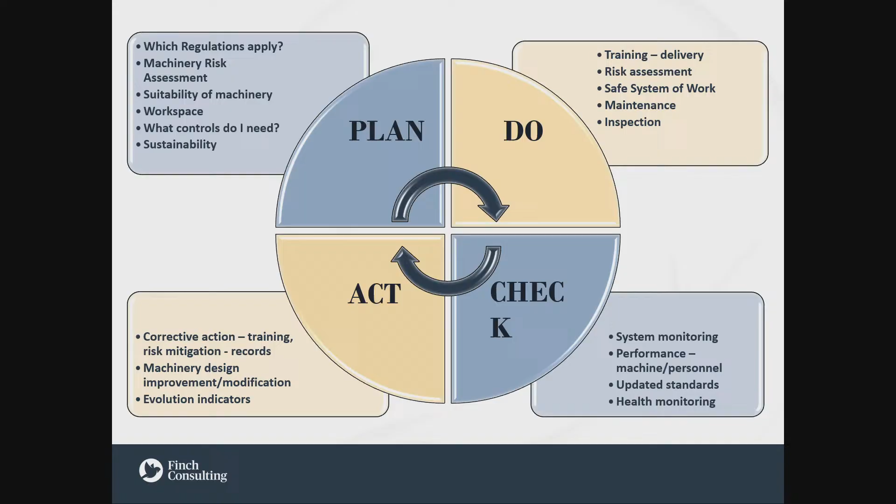So basically, going back to the original slide here, what we're looking at doing is disrupting this complacency cycle. We'll not forget about the left-hand side, we just don't want it. So what we're looking at doing is disrupting this complacency cycle once you've got a decent system in place and you've got the machinery and the processes that are safe. And as I referred to in the previous slide, you've got a decent plan in place.

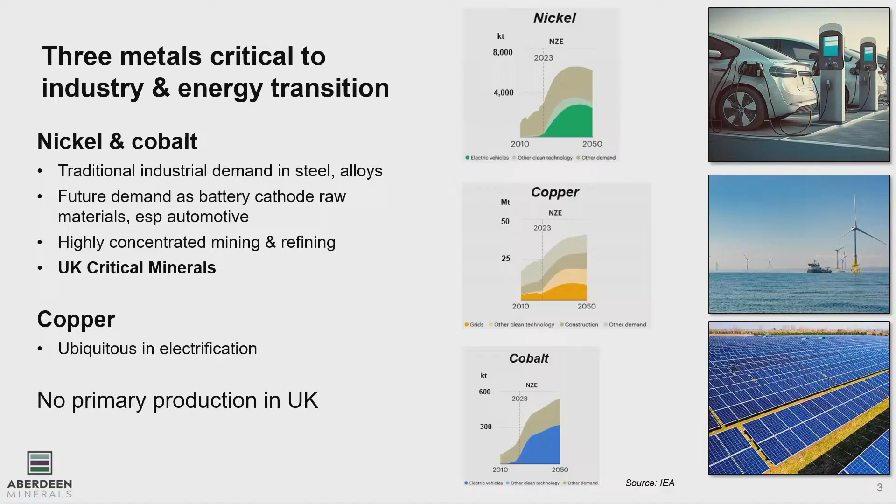The darker the green colour, that indicates that multiple of these materials are considered to be prospective in each of those regions. You can see there that North East Scotland features quite strongly, and that's because the geology is very favourable for nickel

copper sulfide deposits in particular. There are several documented discoveries. We're working on one of them. The favourable geology has historically attracted large mining companies. Rio Tinto consolidated goldfields in the 1960s, AMAX in the 1970s. Falconbridge also took a look at the area. And Inco, a large nickel producer that was taken over by Vale, was active in the area in the mid-2000s.

Despite that history of exploration, the region is very much considered to be underexplored using modern exploration models and technologies. It's an area that's very rich in infrastructure. Good access by roads, excellent access to energy, in particular increasingly renewable energy. The area where we're working is about 20 miles away from two major ports, one at Aberdeen, one at Peterhead, and we also see great potential for a future workforce.

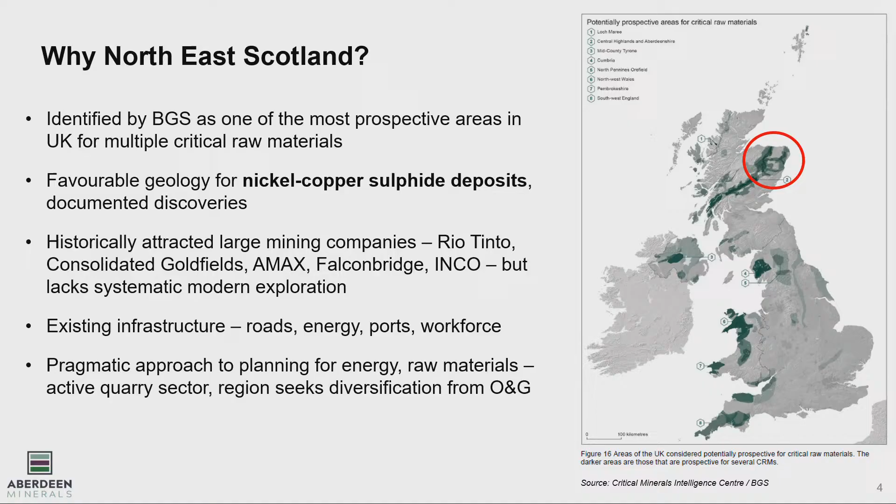The area we're focused on is called Arthrath. It is currently the largest nickel deposit in the UK, and there's a very interesting little discovery story that involves neeps or turnips. And again, if you want to find out more about that and the role of root vegetables in mineral exploration in North East Scotland, we can talk about that a bit further in June.

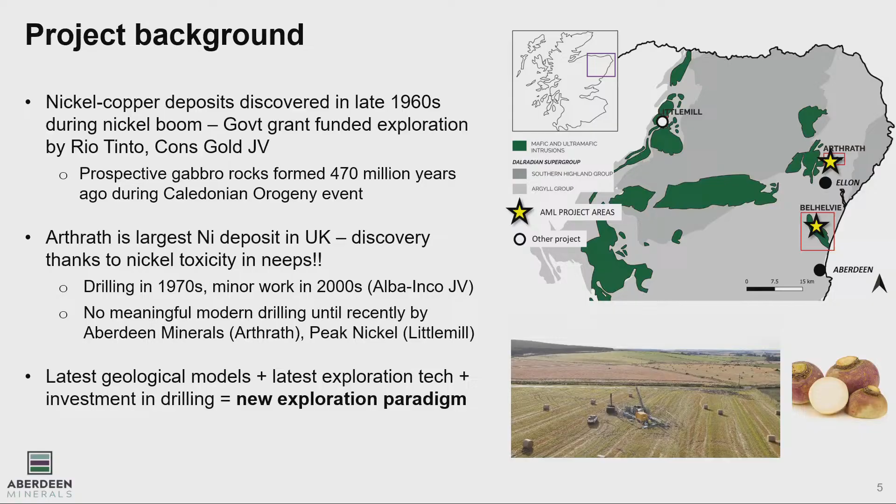So a lot of drilling in the 1970s, a little bit of work in the mid-2000s, but basically no meaningful modern drilling until very recently by ourselves and our colleagues in another private company called Peak Nickel, who are operating over in the western belt on that map there in the area shown as Littlemill. And what we're both doing is applying the latest geological models, the latest technology, investing in drilling for the first time in decades to establish a new exploration paradigm.

And central to all of that is the formation model, what we call the magmatic sulfide conduit model, which was only developed since the 1990s, so after a lot of that historical exploration took place, and this is why we have a new paradigm. We actually have a different, fundamentally different basis in which to explore for these deposit types. This model type just wasn't known about, it wasn't considered until the 1990s.

The sulfur then forms a separate magma made up of iron sulfide, and it's that iron sulfide during that magmatic phase that actually preferentially attracts in any nickel or copper that's floating around in that magma. So the metals of interest are sequestered into sulfide, and then when the magma cools down and starts to solidify, the sulfide minerals are very dense, and so they preferentially gravitate towards the base of these intrusions and form metal-rich accumulations of massive sulfide in trap sites along the base of the intrusions.

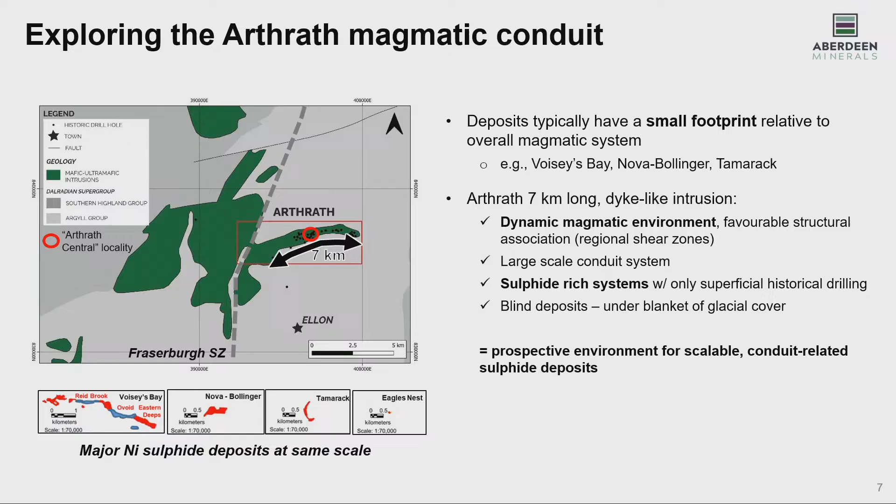So we basically have quite a large playing field at Arthrath, and the little black dots on that map are the historical drill holes. So yes, there has been historical drilling, but it's by no means been comprehensive along the totality of the target intrusion.

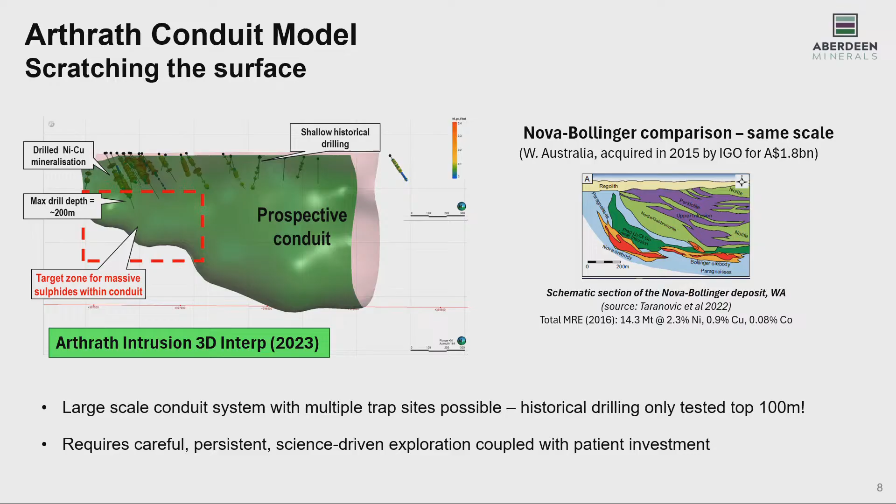Just to illustrate the scale of the prospect that we have, the diagram on the right is a cross-section through the Nova Bollinger nickel sulfide mine in Western Australia at the same scale. The orange and red outlined areas are the semi-massive and massive sulfides - those are the economic parts of that deposit. Again, you can see why we're pretty excited about the scale of the opportunity at Arthrath. There's plenty of scale, plenty of scope to host deposits of that scale.

But carrying out that exploration requires persistence. It requires deep-seeking geophysics, it requires investment in deeper drilling. And those are the steps that we've been following over the past 2 or 3 years with our exploration. We've invested heavily in geophysics, bringing the latest technology to this area that hasn't been explored systematically in over 50 years.

The key property of the nickel sulfides is that they are electrically conductive, so you can use electromagnetic geophysical techniques to directly detect these deposits in the subsurface. The deeper seeking the geophysics, the better opportunity you have to actually find these deposits which remain undiscovered. So the latest technology lets us see through the surface cover and explore for these deeper deposits in more detail than has ever been possible before. We then use other ground-based and borehole geophysical systems, some of this technology for the first time in this area, to expand the search space of our exploration.

But the key thing really is drilling. You can only do so much with geophysics. It tells you about the general properties of a target area, but until you actually get a drill hole into the ground, you're really just guessing what the geology is doing.

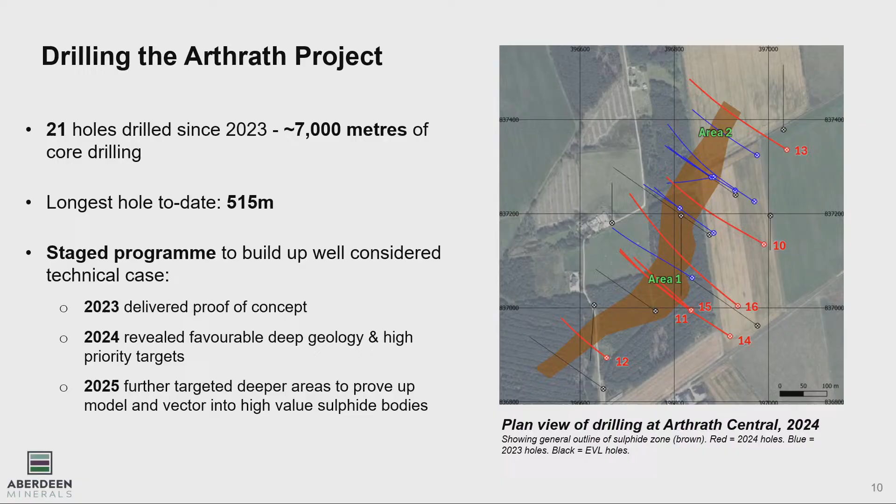So we've been doing a staged program over the past 3 years. In 2023, that was our first drilling campaign - we delivered the proof of concept, and I've got a slide on that in a minute. Last year, we extended our search to put in even more deeper holes and identify targets to focus on. And in 2025, we've continued that work, and in actual fact only demobilised the drill rig from the latest round on Tuesday this week. So we're just coming off the back of another exciting summer drilling programme.

So low impact, low footprint exploration, but in terms of our technical success, really exciting and high. Basically, the drilling that we're doing is transforming our understanding of the potential of North East Scotland. So it's an exciting time.

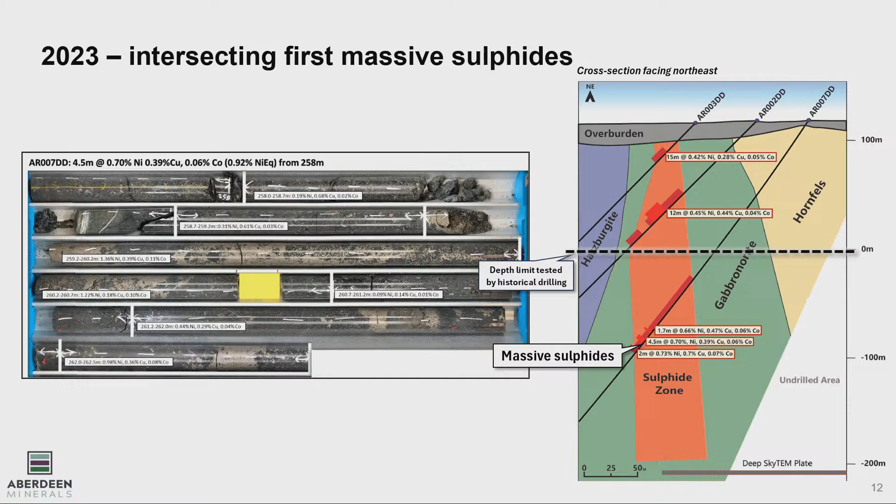So then 2024 was about taking that concept a bit further, that the deeper we go in the system, the more prospective it becomes. Remember our model, we're looking for parts of the intrusion where we hit the floor, or we hit little nooks and crannies where these dense sulfides become concentrated in gravity traps. And that's exactly what we found in our drilling last year.

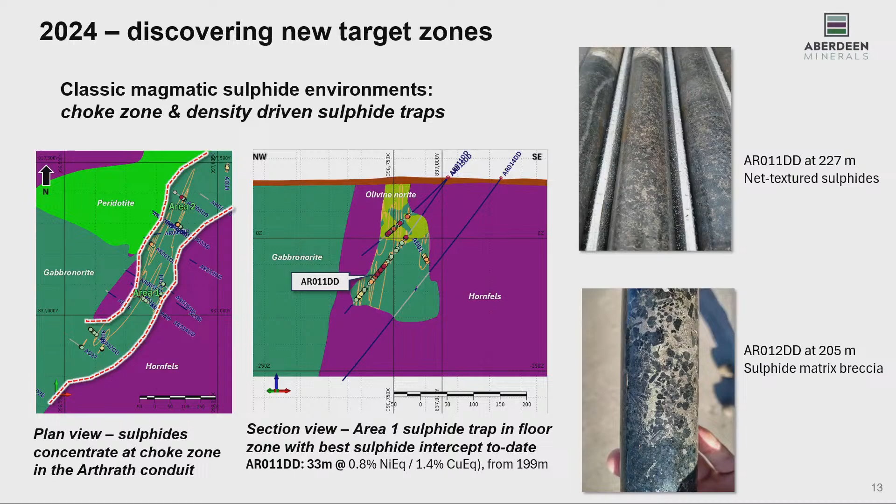And this year's drilling has just taken that all a step further. What we found is that in certain parts of the deposit, we still didn't actually know where the floor zone of the intrusion is. Because understanding that part of the geology is a key part of our model, it was very important to get a more deeply penetrating hole to understand where the base is.

The exploration system there, the prospective geological system, is in operation. We just have to put more drilling in to test it. And some of the drilling results from this year's program have given us some of the best geological textures that we've seen.

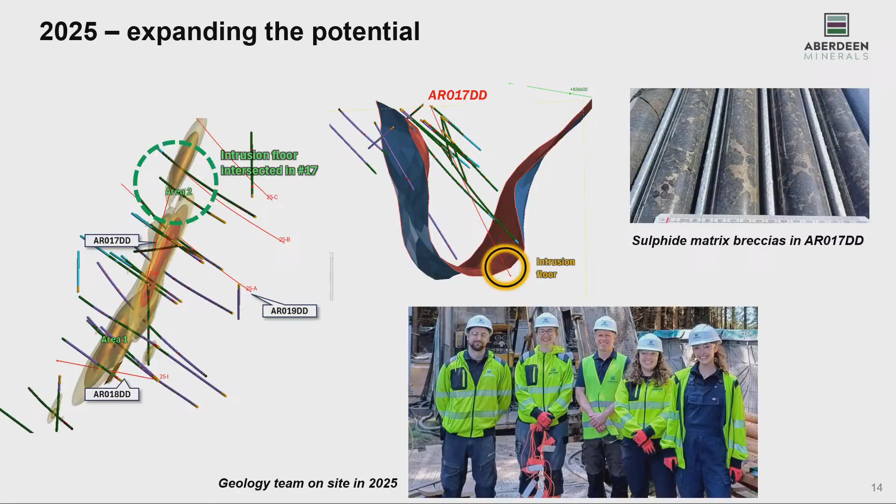The top right-hand diagram shows sulfide matrix breccias that have formed, where basically there's been so much sulfide in the system that it's actually brecciated the host rock. And those are the types of geological clues we want to follow to continue our exploration in the hunt for metal-rich massive sulfide deposits within this prospective system.

So we are really excited about our exploration. We feel as if we're just getting started. We've got another phase of drilling to look forward to, probably into next year, subject to further financial backing.

A key thing about operating in northeast Scotland: if we consider where our nickel currently comes from, the jungles of Indonesia and elsewhere, we think we've got a real advantage developing this type of project in an area like northeast Scotland, a pre-existing industrialised landscape. We can leverage existing infrastructure. We can win value for communities from land which is already nature degraded through intensive agriculture. And it can all be controlled by a very robust planning system to ensure that when we secure raw materials for our energy transition, it's done in a suitably responsible manner.

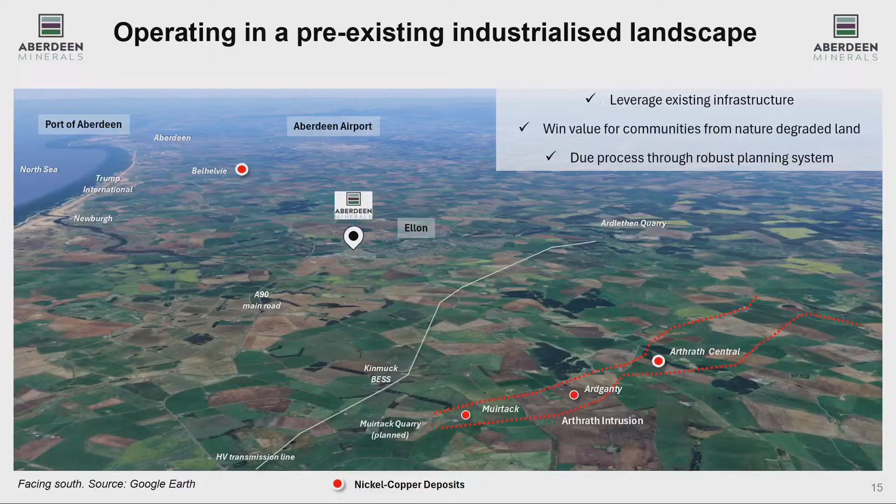So the model we're following, and the nature of the target type, because we're looking for these deeper, higher value but potentially quite small deposits, that target type is well suited for underground mining techniques. So you would access it through an adit or a ramp, and all your mining would be done underground. You would bring that material to surface where it would still need to be processed. So you'd still need some processing infrastructure, but if all you have is your processing on the surface, that results in a much more limited footprint compared to, for example, the open strip mining currently used to source our nickel.

It's about support from the community at the end of the day. Very much so. It's about making the most of the natural resources available to us, but developing them in a way that is responsible and acceptable to those communities. Absolutely.

That was very interesting. Obviously you've only done preliminary drilling as such, and you haven't got the extent of the maximum strike of the ore body yet, so it's very, very hard at this stage to put a resource on there. How long do you think it'll be before you'll be able to add in a resource of what you may or may not have? Yeah, obviously, the sooner we can get to that point, the better.

There is an existing deposit, and we've got a good handle on the grade and tonnage of that existing deposit. But it's not our ultimate target. We're looking for the deeper deposit, which we believe is there, which is higher grade. As soon as our exploration outlines whether that deposit exists and gives us the basic scope of it, the intent then would be to do the detailed drilling required to bring it up to a resource estimate as soon as possible.

18 months ago I stood here and did a little call to action just to make everybody aware about what we were on the cusp of. We're still on the cusp, and I come fresh from Paris, where it was the International Hydropower Association. The reports from Paris are we are on the cusp of an international renaissance in large-scale, long-duration storage of energy to make up for the intermittency of solar and wind, which is the solution to our energy transition.

The story is that pumped storage still brings us flexibility. It creates critical grid stability, and as the earlier presentation by Siemens illustrated, we're using these compensators just now for that inertia solution, but we need an awful lot of them to do that, and pumped storage also provides that solution. Importantly, pumped storage also provides a sink to consume power when we've got too much of it in the grid, which was a concern for those that lived in the Iberian Peninsula not too long ago. Is everyone aware of the blackouts across Portugal and Spain?

So importantly, in Paris, we did discuss that we do need both batteries and pumped storage hydro, and so it's not a competition between short-term and long-duration. These are complementary solutions. So why are we talking about that in the mining context? Well, I'll go on to explore that some more later on.

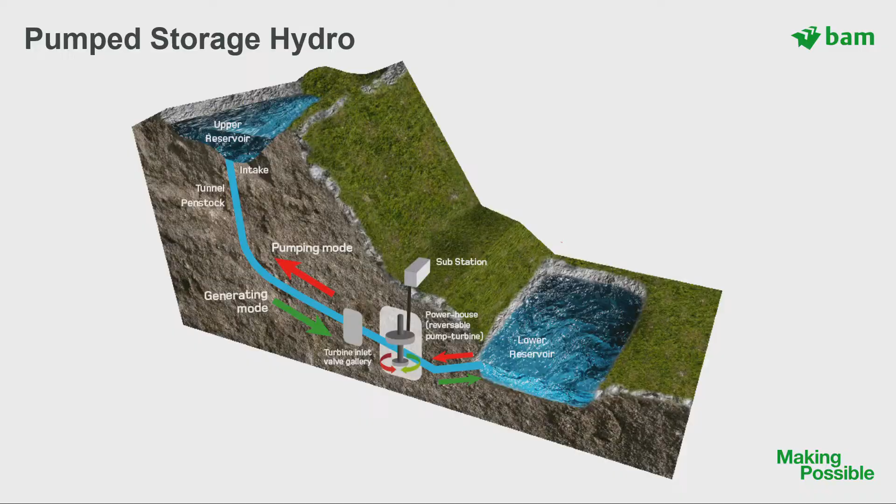How does it work? You were all here last year, weren't you? Do you remember how it works? Keith does. You have an upper reservoir full of water. You let that water out through your hydro plant into a lower reservoir, and then when you've got excess power in the grid, you pump the water back up the hill into your reservoir, store that potential energy for the future. So making up for that intermittency in solar and wind.

We have both closed loop and open loop systems. So in a closed loop, you just exchange the same water back and forward. There are plans afoot, for instance, making use of seawater in that instance. Obviously, you don't want that leaking out into the local environment. Or open loop, in which case the water is passing through the lower reservoir.

So when I stood here 18 months ago, I presented this map, which illustrated potentially 9 prospective sites across the UK, with a predominance really for the hard rock areas where the change in topography, higher rainfall potential, the ability to construct underground spaces in reasonably competent material to cope with the high pressures involved, because we're typically talking about 500 metres of head in these hydraulic systems.

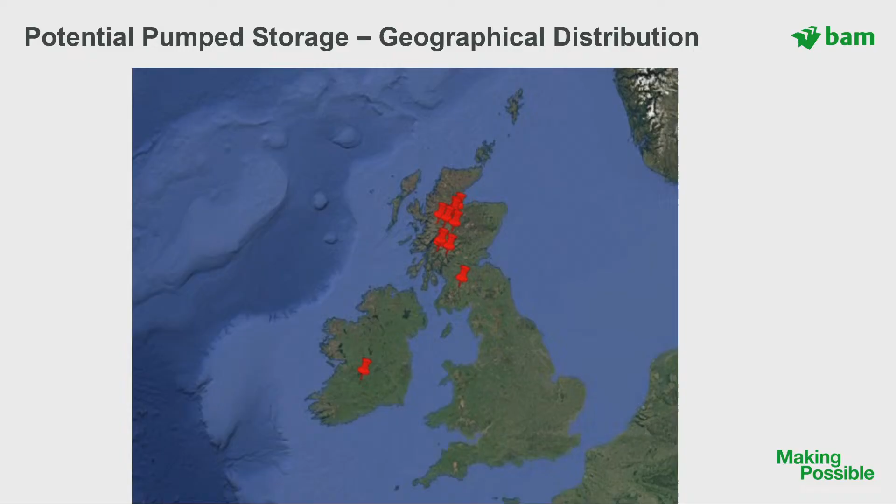So what kind of activities are going to happen? Well, very similar to everything else that we've talked about today. Ongoing on the most advanced projects are exploratory drilling to confirm the ground conditions, environmental surveys for ecology, working out how the hydraulic systems are going to interface with each other.

And then unfortunately, in terms of timeline, there's also that restriction that, generally speaking, the deep drilling to investigate the ground can't go deeper than 200 metres. Is there a reason for that, Fraser? Yeah. You just need a license, yes. So it needs strategic thinking, a bit of forward planning, and you need to submit the paperwork.

So there's only one project that's managed to go further than 200 metres so far, and that's Coire Glas, and they completed one hole to 650 metres. So that's 2 holes. Oh, what's that? You've done it 3 times. Of course you have. And this is why there needs to be the crossover in sectors, because the energy sector, as they would call themselves, is trying to overcome problems that other sectors have already solved.

But it's all about having a strategic agenda that we work towards, a bit of forward planning. Okay.

In the creation of these facilities, large, very large, humongous laydown areas, flat spaces for process facilities are going to be created for substations and above ground constructions. So we're making holes in the ground in areas where there isn't very much flat space just now, because as you can tell from the previous map, it's all mountainous areas.

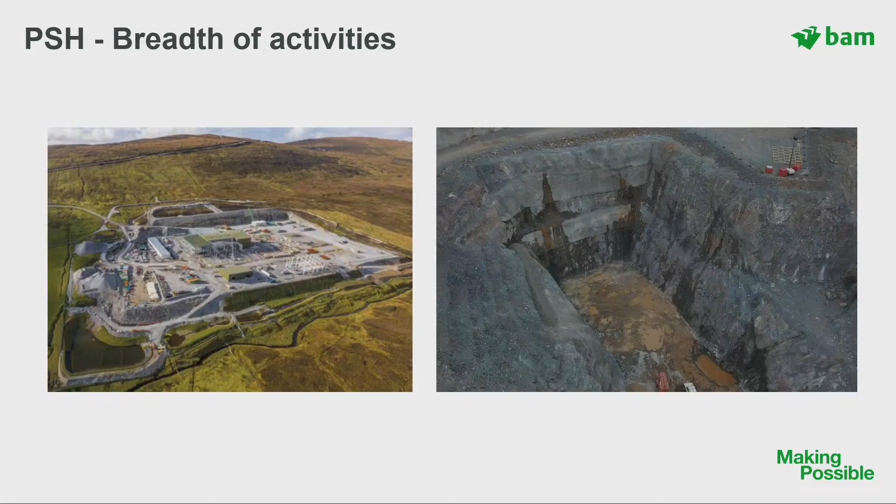Most of the solutions are going to involve underground caverns and tunnels, and therefore we're creating portals and spaces in order to enter underground spaces. And typically the schemes involve, each one of them, around 20 kilometres of underground tunnelling in various forms. And each of the transformer and generating halls are underground spaces, as we'll illustrate in the right-hand photo here. That one there.

They're cathedrals, between 65 and 80 metres high, between 55 and 63 metres across, 120, 140 metres long, all deep underground, generally positioned with their invert level below the level of the lower reservoir. So imagine walking into York Minster or Beverley Cathedral or Westminster Cathedral, etc. A space that big, 600 metres underground, maybe 2 kilometres into the hillside horizontally.

There's also some dams to build, just minor surface works, but probably the biggest of which, the material for these derived from the excavation of the underground spaces, material reused, repurposed for the construction of dams in order to impound these upper reservoirs.

An example would be Coire Glas, where their upper reservoir is 92 metres high, it's 760 metres long. It's of the order of 160 metres wide at its toe. Millions of cubic metres of material constructed over the period of 4 to 5 years creating a dam. It's not one of those things where you click your fingers.

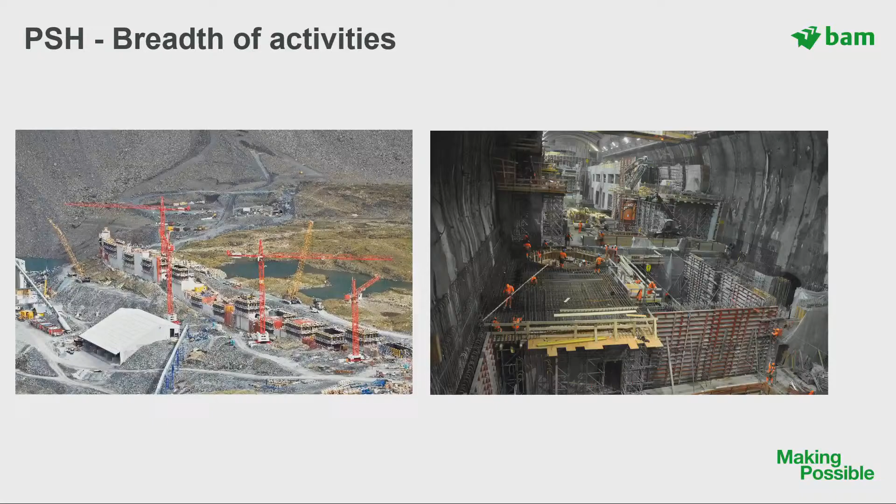Complication as well, when we come to putting water in those tunnels, the rock and lining can't cope with the pressures involved. So getting large steel tubes underground, and not just underground, getting them from wherever we can fabricate them across the Scottish Highlands to a place where we then drive them underground and then weld them together, calling on resources from throughout the world.

The reality being, for steel tubes, potentially manufactured or started to be fabricated potentially in this part of the world or Belgium, and then shipped in parts to the northwest of Scotland. Anybody excited yet?

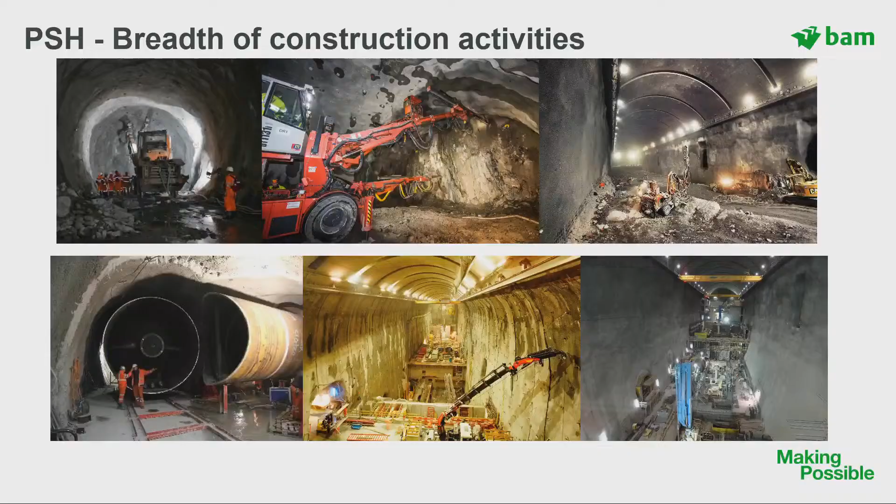So here's one of the schemes that's well advanced. They're in their second phase of ground investigation. This is Loch Kemp on the shores of Loch Ness. Loch Ness, where the monster lies, is their lower reservoir, so a huge potential body of water.

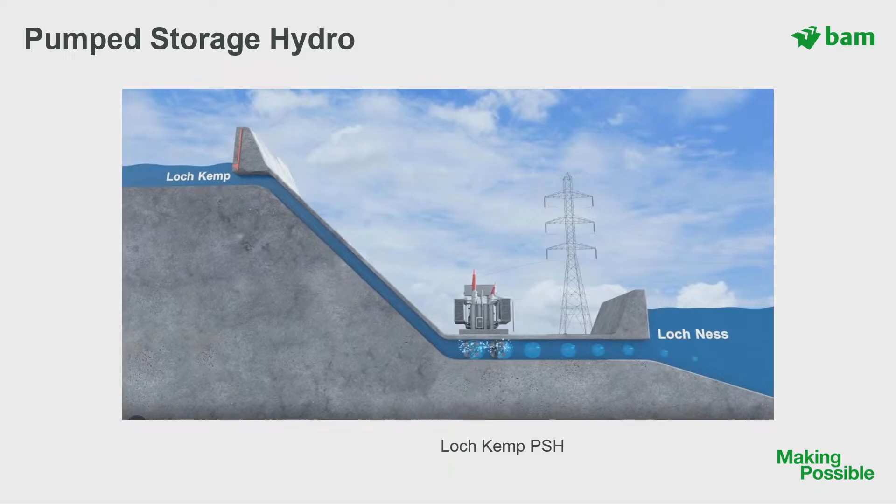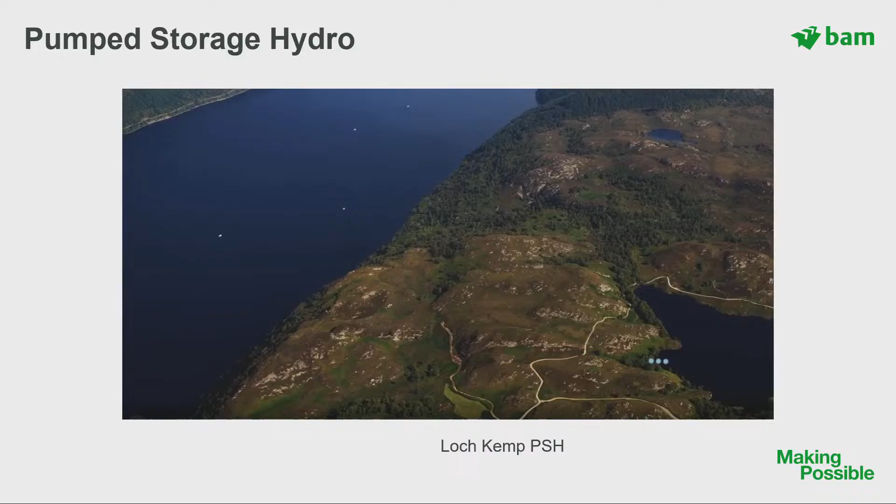Idea being that it can produce electricity when there's demand, and then when there's not demand, pump the water back uphill. Or indeed just spin the turbines so that they're ready to pump, or so that they're consuming energy within the grid, providing that inertia that Siemens discussed first thing this morning. Getting rid of those lumps and bumps created by the wind turbines and the direct current and all these other things, getting everything in phase, a whole part of engineering that I don't quite understand, but I think it's important.

Underground spaces, tunnels, some lochside works, and these lochside works, a slightly different arrangement here in that the turbines, 4 turbines, will be located in deep shafts, 60 metres deep on the shores of Loch Ness, and then the upper reservoir being contained in this instance by 8 dams formed with the material that comes from below ground. And that's one of the potential 9.

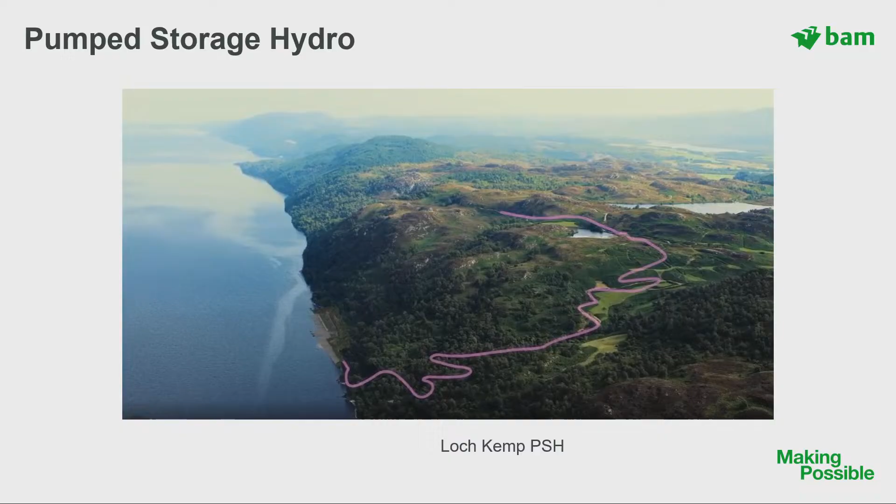We need access, or whoever builds it will need access, I have to say. And this is the potential of what's left on the shores of Loch Ness when it's finished. So what's been happening?

We talked about we need a strategy. We need to know that's what's been done. There needs to be a mandate. The mandate needs to tie up with planning so we can get the permitting, all these things. So NESO, who's heard of NESO before now?

The National Energy System Operator, used to be National Grid, NESO. So they try to predict the different scenarios of what energy we need, where we need it, and how we're going to consume it. They put the strategy in place, they tell us what's needed, and then that really advises us about where the investment happens in the infrastructure, the grid, where we need to produce power.

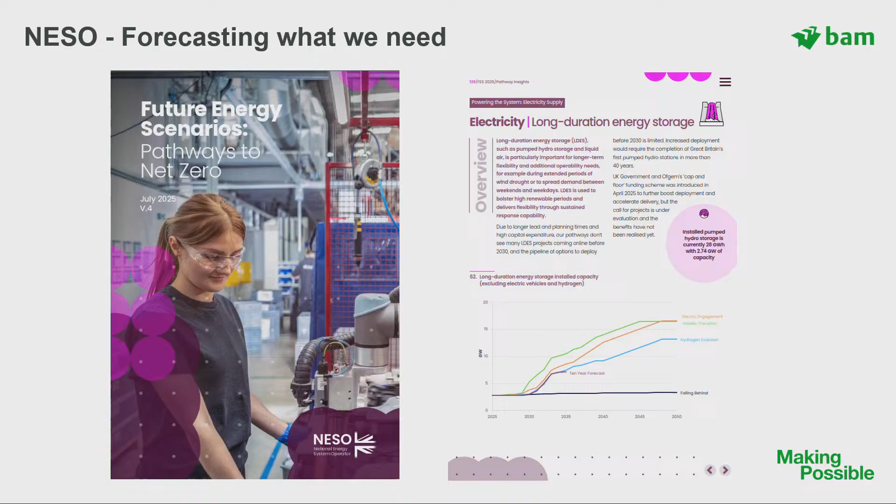So the big driver is net zero 2050. Well, how are we going to get there? Well, as we discussed at lunch, we switch off all our coal-fired power stations, but currently we're buying in renewable power from other parts of Europe because we can't produce it ourselves. So the time ticks over. Importantly, if we do nothing, we're going to run out of power, and we're going to be the same as Portugal and Spain. The lights will go out. So this is what their future scenarios report tells us, and that kick-starts the process.

In terms of supporting the argument for underground construction in the form of pumped storage hydro, their document in 2025 says we've got 2.8, so that's our 4 current facilities. That's in the red circle there. By 2030, we need to have improved that to 5.3 gigawatts. By 2040, up to 14, and by 2050, that's 16.6 gigawatts. So that's 9 or 10 of these power stations built underground and in the ground by 2050 to meet our net zero, alongside all of the BESS units that are currently planned or in process.

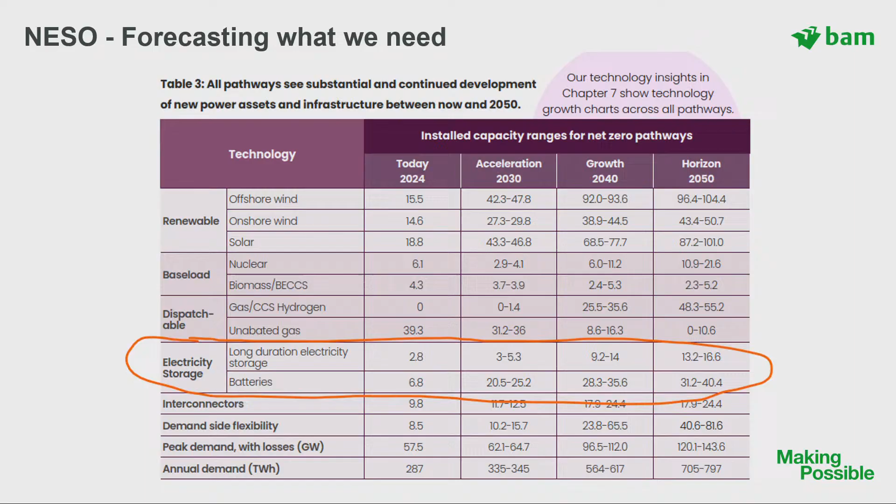So 16.6 gigawatts in pumped storage hydro, and up to 40 gigawatts in conventional batteries, which are going to draw on all those critical mineral resources that we're going to need from underground from Aberdeenshire, aren't they? So to follow on that, DESNZ put out the consultation, because things started to move quite quickly after the instigation of the legislation. January 2024, they created a scheme to produce the investment, because one of the issues with pumped storage hydro, you can't invest today and get a return tomorrow. You invest today, you get return in 12 or 15 years' time. The investment markets don't like that.

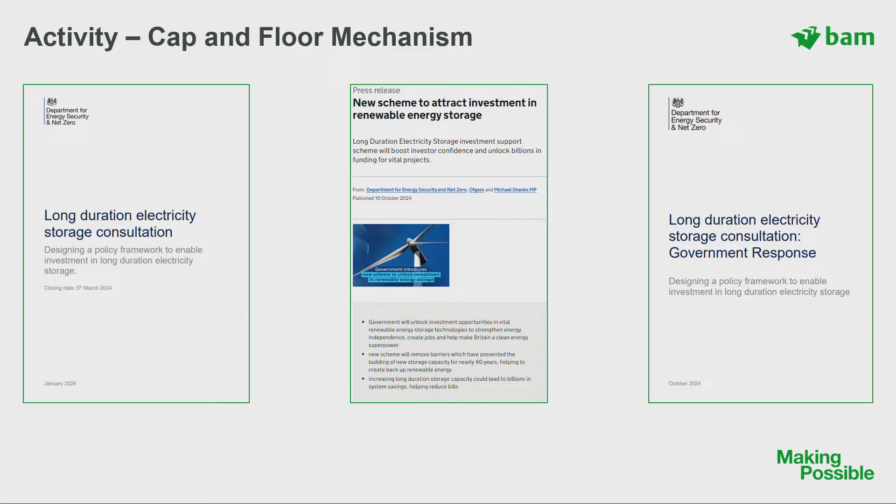So there was a consultation, there was a response provided, and they went out to the market. Ofgem agreed to be the regulator on that, and then, look at the dates here, they issued their consultation on the 18th of December 2024, and the response deadline was the 8th of January 2025. Guess who had a very busy Christmas?

So, all the developers went mad to try and create the body of information, because very quickly after that, in March, they opened their technical decision document, and there was an application deadline to put in applications for your project to support this long duration energy storage, for which they received 171 bids. And they will determine in the next 3 weeks what that output is.

What we're expecting to happen is they'll then enter into negotiation with each of those developers to choose which ones they support in what they're calling window 1, so that's projects that can be complete by 2030, and then window 2, which are those projects that can be complete by 2033. All very aspirational and optimistic dates, I would suggest. Onwards and upwards from that, the other probably 6 projects up to your 13.2 gigawatts will follow. So we need between 3 and 5.3 gigawatts of long duration storage to meet our clean energy goals by 2030. So that's 2 projects complete by 2030.

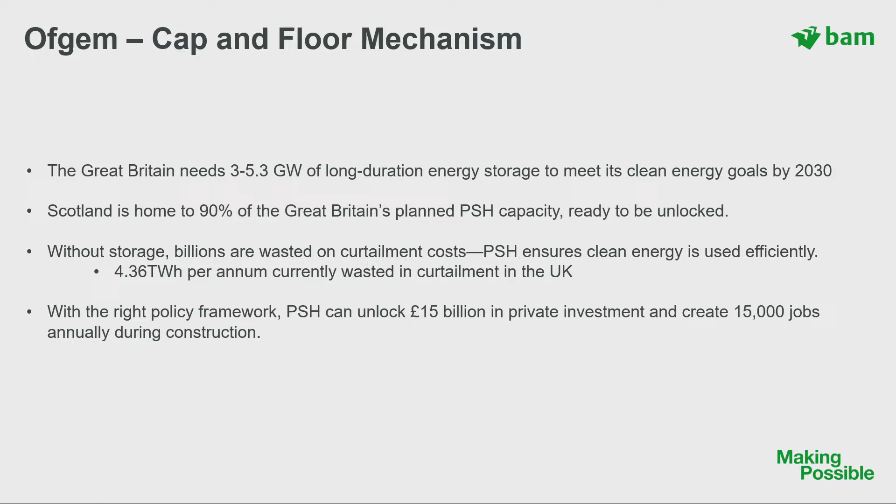If the nation are building 2 or 3 of these at a time, that's 4,500 people directly employed on each project, all within 15 kilometres of Fort William, if Fort William can cope with that many more people. And then the burden on all the other supporting services like schools, social, doctors, etc. This is potentially one of the first to go to site.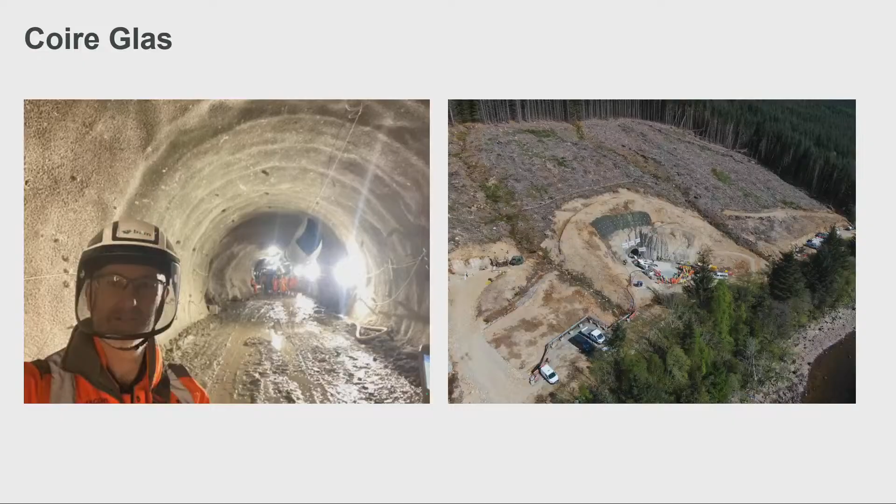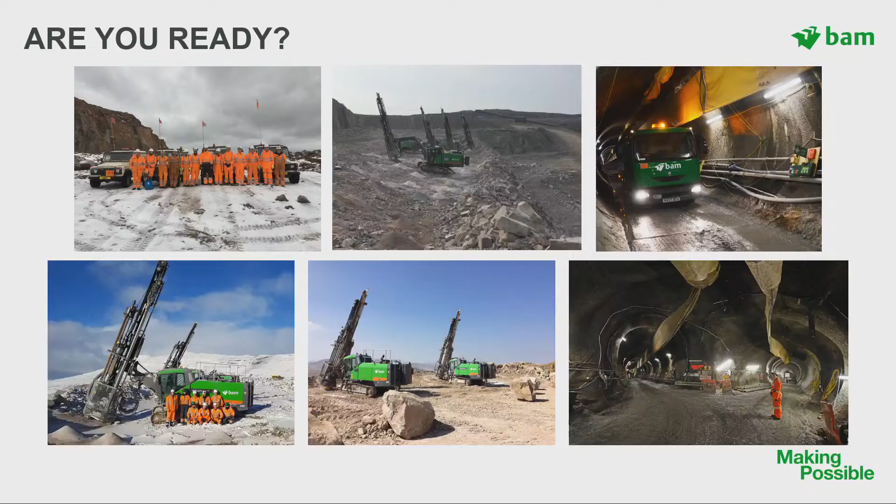Coire Glas is well advanced. In terms of planning, they drove a trial adit to 1,200 metres. It's been on site. SSE have a preferred contractor ready to start when the mechanism is released. So the call to arms is BAM are preparing to support this initiative, but the reality is it's going to need sector-wide solutions.

Are you ready? Because if you're not, it's going to draw down on your resources because there's going to be a demand to get this energy transition. So you need to be aware that it's happening. And all I'm doing today is to make you aware that all sectors will be affected by this. Thank you.

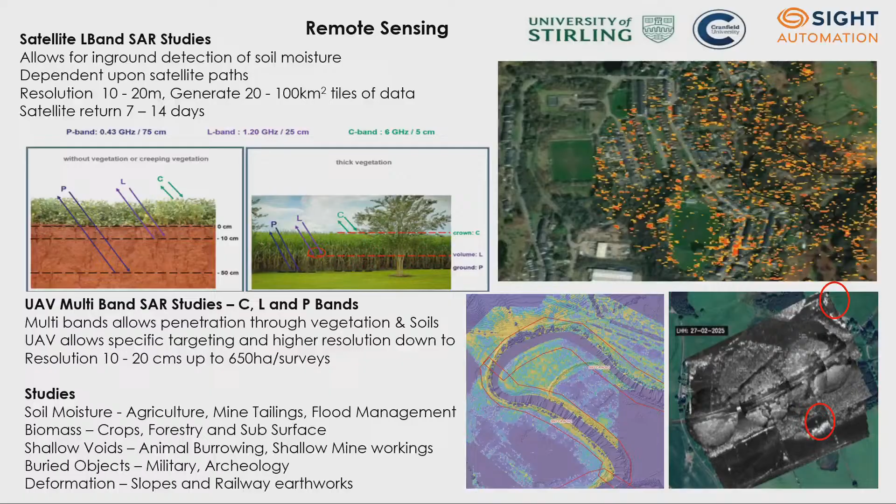Shallow voids - the stuff on the right-hand side is from somebody releasing a lot of beavers in Scotland. They became a nuisance immediately by making burrows. Network Rail wanted to know where these burrows were, so we flew the drone over, and you can see the white dots there - that's where we're able to measure beaver burrows by UAV. Since this was sent to Network Rail, they've been very happy and sent us on to sort out their bigger, more disruptive cousins, the badgers. We're doing a flight at the moment in Scotland for Network Rail, and we're doing the processing.

In terms of instrumentation, this is putting instruments in the ground - piezometers, tilt meters, pressure sensors, etc. We do a lot of this work for different sectors, and it enables us to ground truth any airborne studies, which is critically important. There aren't too many companies with the capacity to handle this spread of ground condition data. We've got 7,000 sensors in Network Rail's western region, monitoring long rail tracks in terms of embankments and soil moisture conditions for slippage and movement of rail embankments.

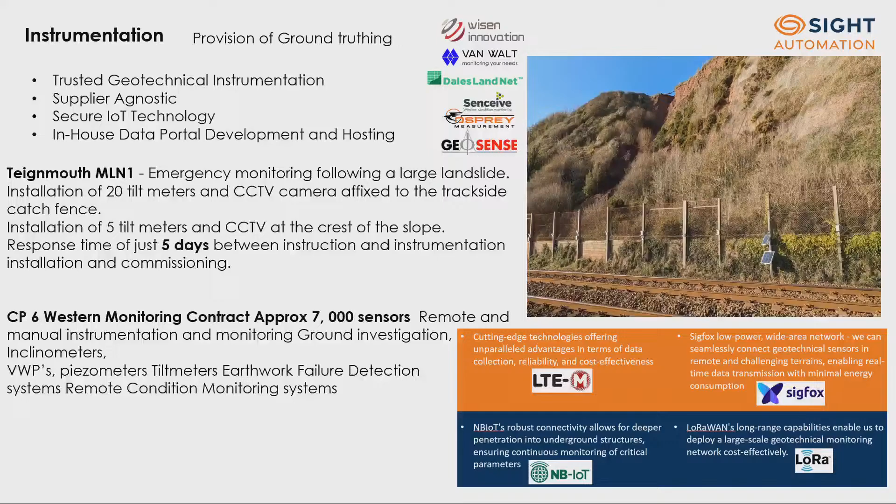Once you've got the data, we need to move it - telemetry - and those are four of the protocols we use to move this data up into the cloud and make it secure. Once it's in the cloud, we want to ensure it's safe and available, and you can start drawing down information. We host data for a number of fairly big organisations - Network Rail, BAE Systems, AMCO, Jacobs, the Environment Agency, amongst others. We have our own capabilities of creating portals and dashboards, making it available to users to get a real broad understanding of what's happening on that site. Dashboards are linked to alerts and alarms on smartphones, communicating effectively when an intervention is required.

In terms of other projects we get involved in, this is another shot of a drone showing the P-band, C-band, and L-band sensors. This drone has just come back from Portugal - we're doing a study for a mining company. We're looking at moisture, shallow voids, deformation, biomass, greenhouse gas. We've just acquired some sensors for greenhouse gas detection on water treatment plants, because the best way of understanding what greenhouse gases are emitted is to fly above them - there's no point putting a sensor on the floor, it's not very effective. So we're in discussions to fly around water treatment plants, which create greenhouse gases, and conduct measurements on that.

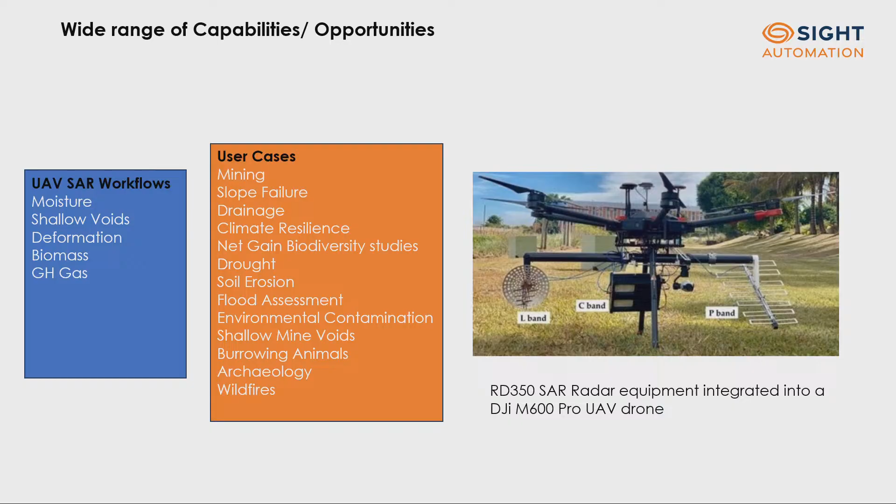We've got a better way of doing it, and it can cover more ground, and it's very accurate as well. And in terms of interpretation, it's not the squiggly line stuff that you get with GPRs, it's a bit more than that.

And this is what it looked at. So this is a project that was done in Finland, part of the GoldenEye funded project by the EU on strategic minerals. The warm colours show this is a tailings storage facility. Great heat at the moment in terms of safety on TSFs. One of the critical factors of TSFs is understanding where there's a potential in terms of failure.

Often failure is driven by excessive soil moisture and slippage, and this is what these sort of things are picking out. This was a resolution of between 10 and 20 centimetres over a 50 hectare surface, pretty big bit of ground. We use C, L and P-band.

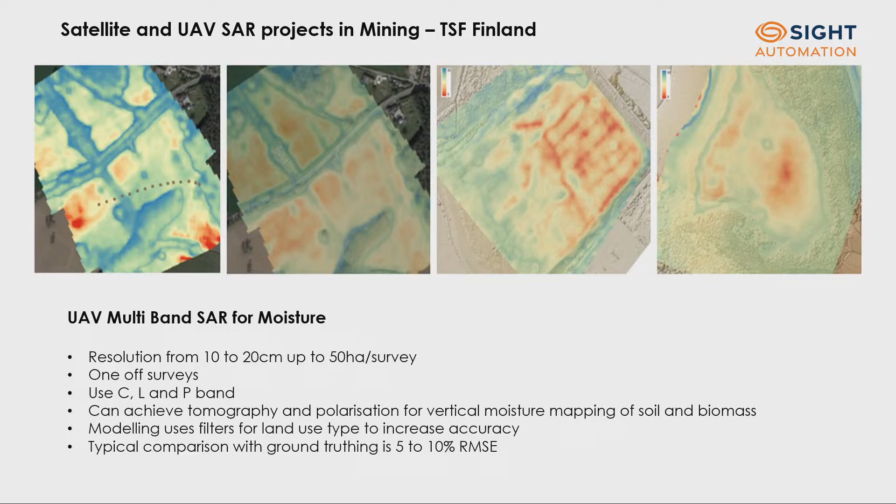And we can achieve tomography on this. What's meant by tomography here is that as the P-band penetrates through, we can individually section the top 20 centimetres, the middle centimetres, and go down. So we're getting levels of soil moisture within that band as well. It's new work, but it's coming up trumps at the moment, and we're quite confident.

There's a job that we did. It started off, phase 1 started off with a coal authority. Phase 2 we've just finished for the Welsh Government. So this is on category D spoil tips. You can see it outlined in that sort of black line. And what we're showing here is soil moisture greater than 40%.

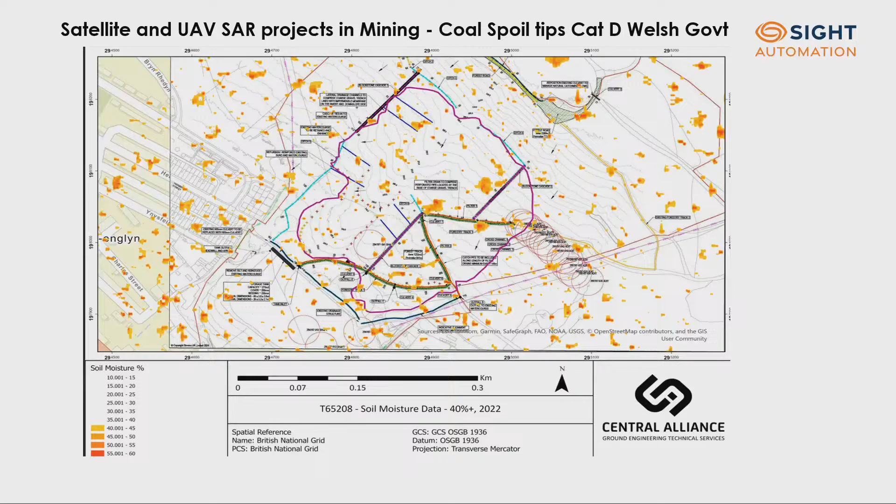So this was done in '22, a satellite pass. This is what it looked like November '24. We did it seasonally. And this is what it looks like in May 2025. So you're getting a really good model of what's happening on this spoil tip.

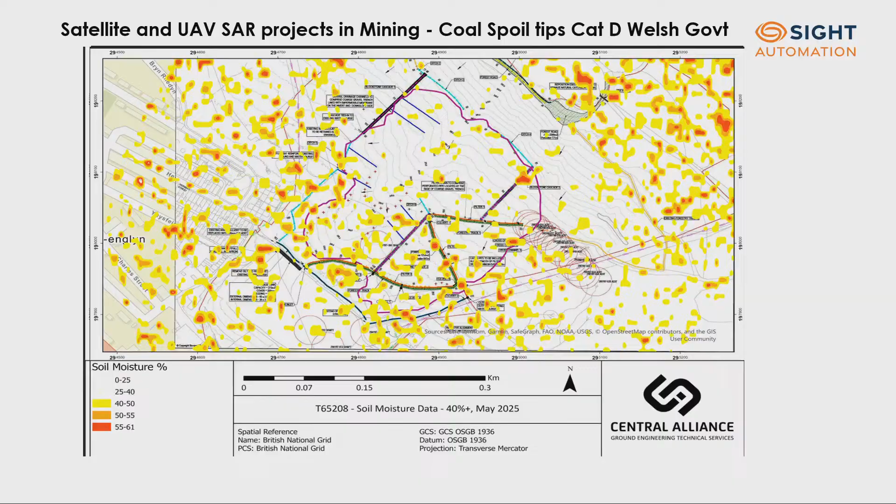The lines that you see across it are where a sister company of ours called Binnies is doing some drainage planning and remediation to help drain this particular spoil tip. And quite obviously, for them to have this level of data before and after they've done their drainage is a pretty good, useful way of doing things. So we're looking to do another trial using a UAV, not a satellite, towards the end of this year.

Just a couple of slides on AI analytics. We are a partner of a company called Purple Transform, who are absolutely fantastic with sort of AI and analytics and data scientists, very clever guys. They're an award-winning company. What happens here is that this data is a large body of data, several hundred gigabytes in some degrees. So you need some power behind this to pull out data anomalies, the relationships within the data, and really get some clear understanding of it.

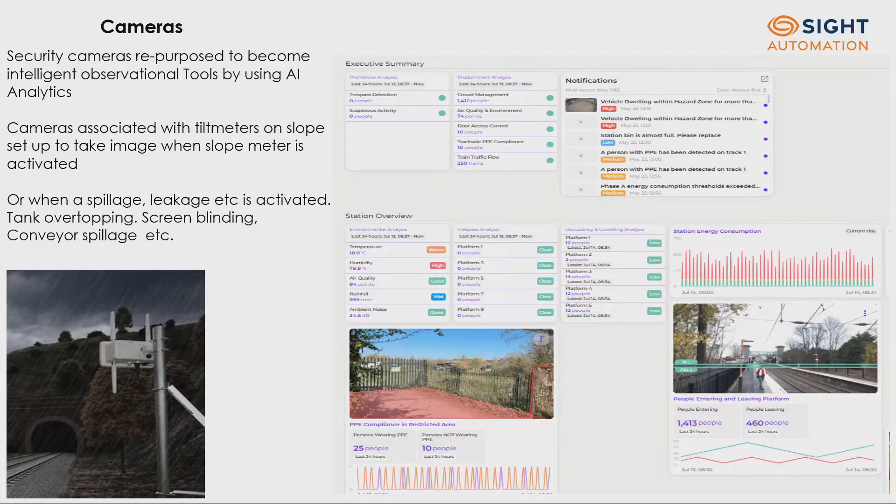So again, it's squeezing the data that's available. In summary, we're about data acquisition in many different forms. We have experience in how to handle that data and squeeze some value out of it in terms of rapidly moving it into information. That's us really - one of our key areas is monitoring and remote monitoring, and it's an exciting and fast-moving area. Thank you very much.

In terms of the multi-band, I was wondering how it's affected by altitude, and whether it affects anybody who walks under it - personnel or anything like that?

No, I don't think so. No, it doesn't. They've gone through critical cases - it's a fairly common approach, these are radio waves effectively, at different wavelengths. So there's nothing spectacular about it at all, it's just that you've got to pick out the frequencies you want for a radar. So in practice, could it perhaps be used from a satellite? Yes, it's one and the same thing, it's just that with a drone you're not confined to just L-band or certain bands fixed to the satellite - we can choose which bands we put on our drones. So it gives us much more flexibility in how we approach that project for that client.